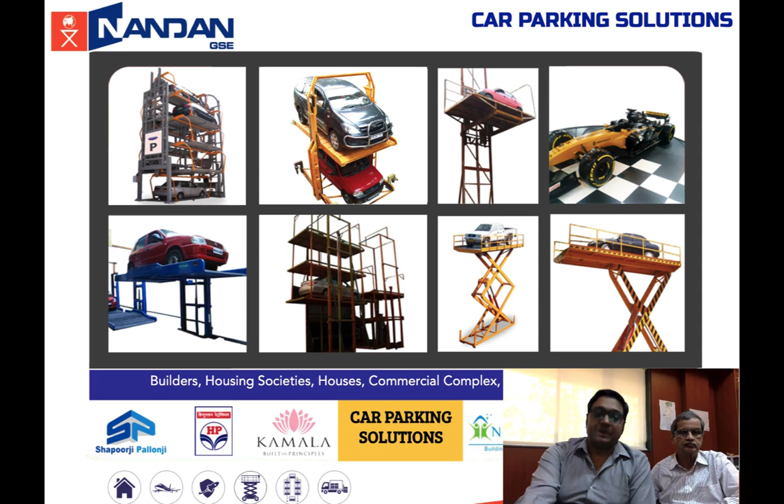And that again is in line with our pitch to improve on the core purpose, which is to utilize mankind for greater endeavors and not just for manual handling.

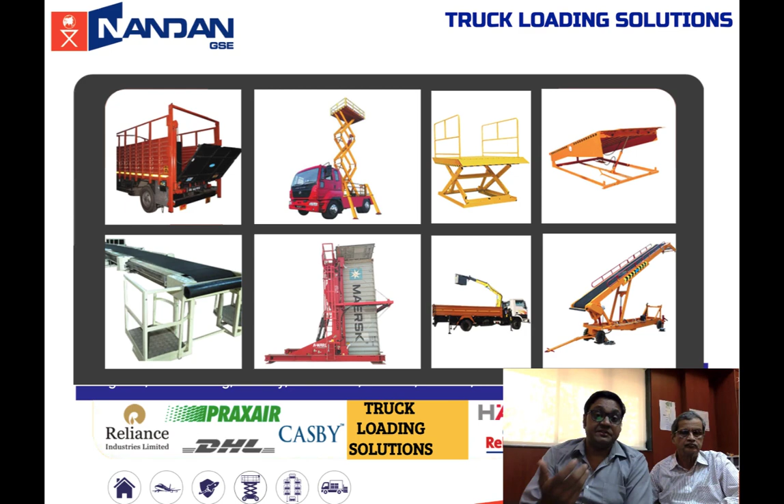This is changing the way things are being done, even in Asian countries or even in India, and there's a lot of buy-in from customers there.

The reason why we remain nimble is because we deliver across a wide range of solutions to a wide range of industries. So for us, each and every client and clientele is important, and that's how the sales team is also segregated.

The solutioning ability is unparalleled because we are able to move from a defense project down to material handling, which could be maybe even a commodity product.

But when the customer buys it from us, he is actually the one to give us the next referral because he loves the product so much. So, like we said, we are not necessarily the cheapest, but we are always the best value for money investment that the customer can make.

We've been featured and we've got various awards and accolades, like we put it up. We've done a car parking system for one of India's most respected business leaders, Mr. Ratan Tata, who's the chairman emeritus of the Tata Group.

I was awarded CEO of the Year last year by Business Connect magazine. We've been awarded for innovation by the government of Maharashtra out of all of the various companies. And we were also the SME Gold Award winner All India for small and medium enterprises in our category, a big feather in the cap for whole of Team Nandan.

We've done theme park rides, handling systems for missiles and other things, and a lot of them are appreciated by customers. So talking about Nandan, like we said, we don't have a standard product catalog.

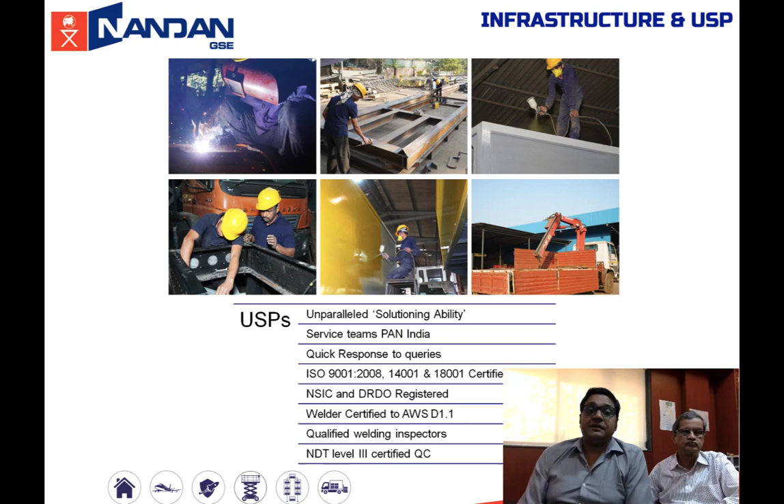Welders are certified to AWS D1.1. We have NDT qualified quality control engineers, painting systems, and the works. So in all, you're in good place when you come to Nandan.

We are able to deliver electro hydraulic and mechanical systems, and we've invested a lot into learning and development. So the team has grown. Our team is able to be your partners in your productivity.

We are ISO 9001, 14001, 45001 certified. We are registered with the various NSICs. We follow the IATA AHM 2019.

Incidentally, I was told by IATA that we are the first out of India to pre-book the 2020 standard. So we believe a lot in learning and going as per the standards and always keeping up to that.

Welding is very core to what we do. We get a third party auditor and certification for all my welders.

Designing is a core strength of Nandan, so we are able to 3D model and showcase the product to the customer before it is actually made.

Safety is very important in what we do, considering the fact that we work in aviation, material handling, defense, and so many other things.

So when we do our systems, whether manufacturing, designing, or delivering them, we always consider the safety of the man who's making it, the man or woman who's going to be using it, and finally the surrounding as well as the articles.

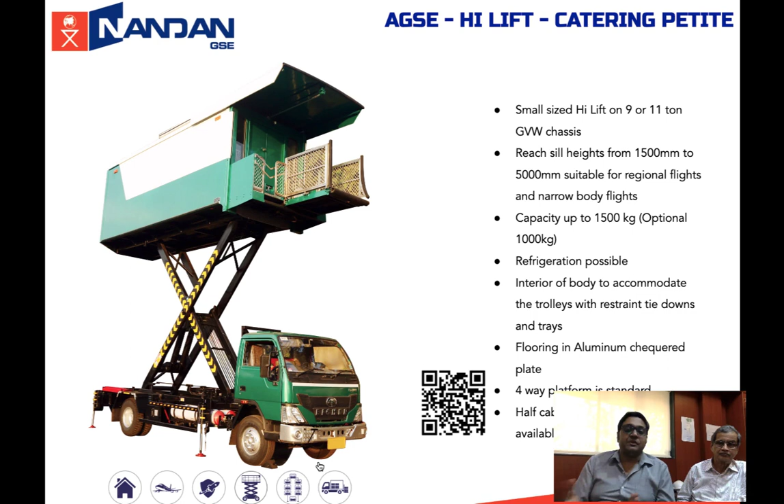But if you want to work on a specific chassis based on your location, we can always make the kit, ship it out to your location, and mount it there locally on a bodybuilder place, and then we can get going on to that so that there's value. Or we can get the chassis into India, make it, and give it to you turnkey. Either option is okay. The capacities are up to 3 tons.

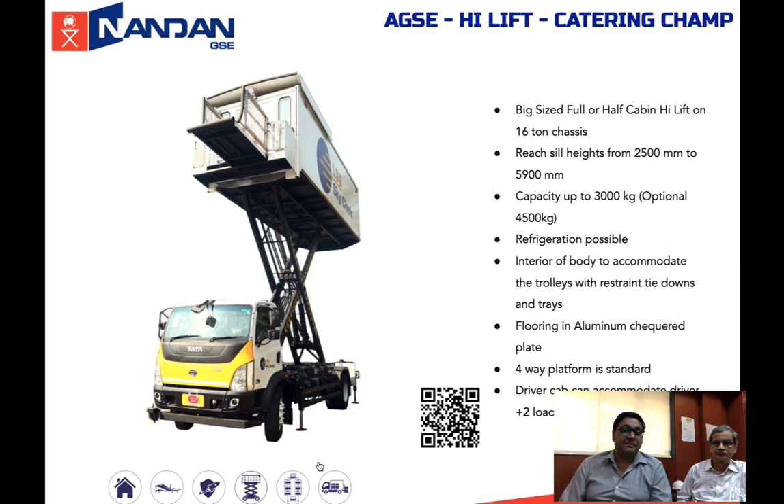Height can go up to 2.5, from 2.5 meters to 5.9 meters. Air conditioned driver cab and the works. So again, this surpasses all kinds of requirements that we need. You can do side doors, you can do front doors, you can do different kinds of tail lifts in the back, refrigeration units, automatic transmission, manual transmission. So it's a different product altogether.

So when we need to talk to you about the high lift, for sure I can present it to you there.

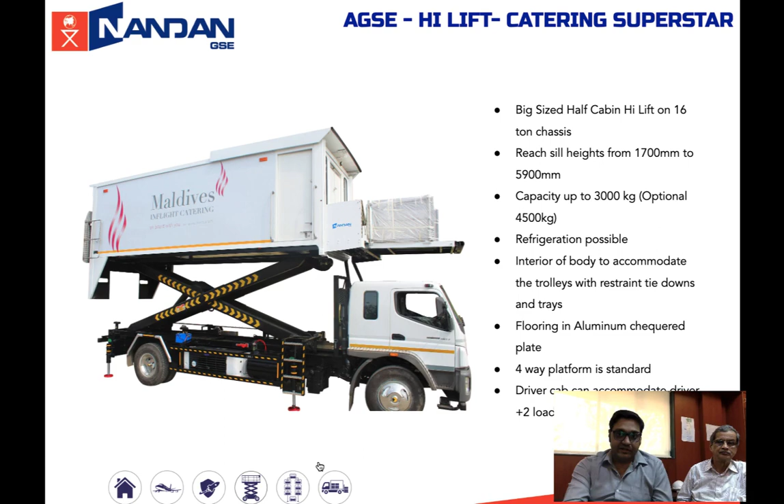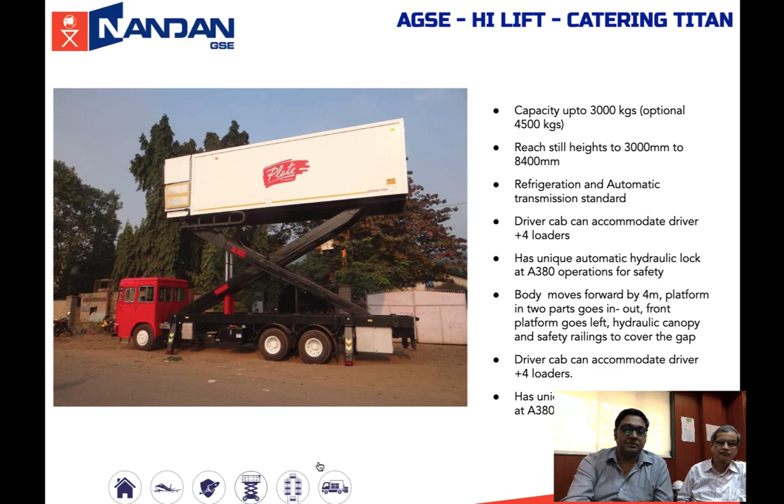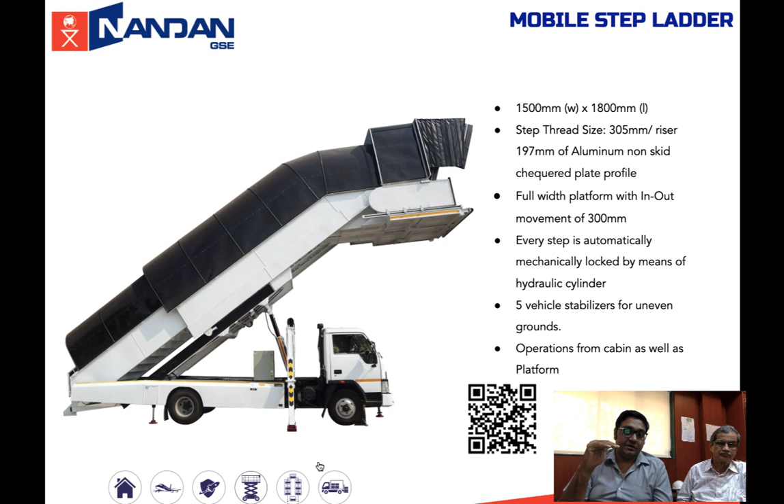We do step ladders for climbing into the aircraft. This is a standard universal model that we give out. It can do from a 737 right up to a jumbo or the lower deck of the A380. All of them is possible.

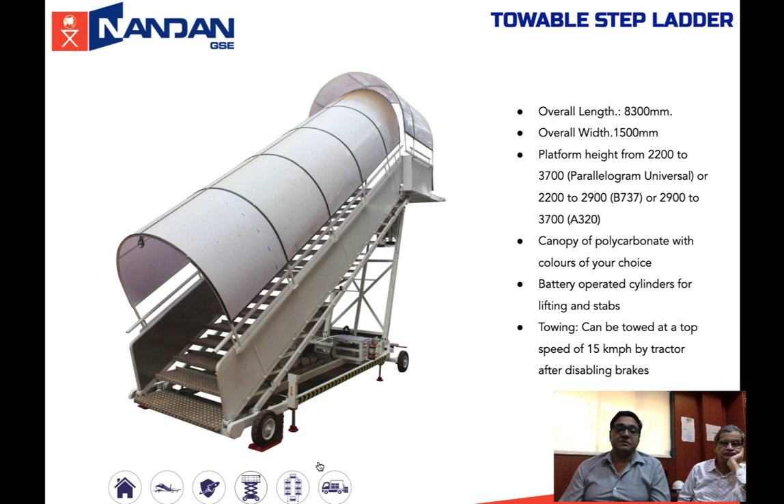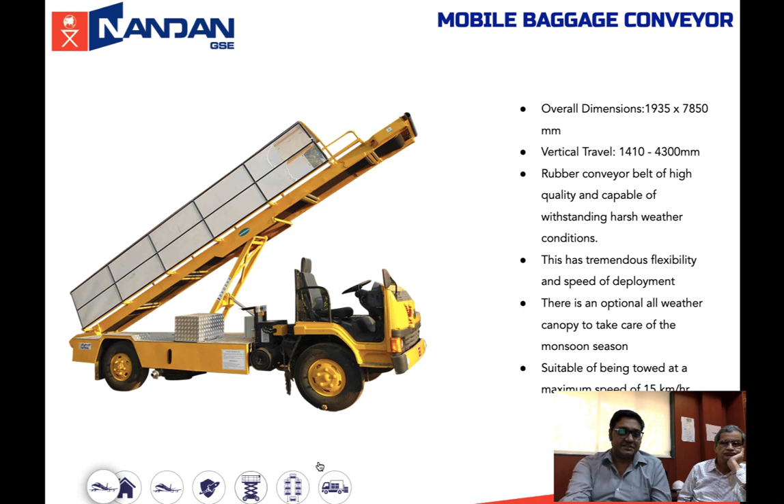Mobile baggage conveyors for loading bags on a vehicle mounted chassis or self propelled. Towable ones with an engine there, and again which can load into the aircraft in and out.

Ambulift for disabled passengers. This is a very important product because people who cannot walk or who are old and have ambulatory problems can be taken on this.

This is a very important product called the Ambulift, which should ideally be there in every airport all around the world. For people who can't walk, there is a wheelchair available in the airport, and to load that, there's a tail lift in the back of this Ambulift, which can get then taken in the body.

It's an air-conditioned body. Then it drives to the aircraft, lifts up, aligns, and then they can be pushed into the aircraft in a very safe as well as in a right manner, because it's legally wrong to pick them up and take them up the stairs, where a lot of countries actually take the shortcut to do this, but this is not the right way.

As per the IATA AHM norms, unless there's an aero bridge, you always need an Ambulift to take them up.

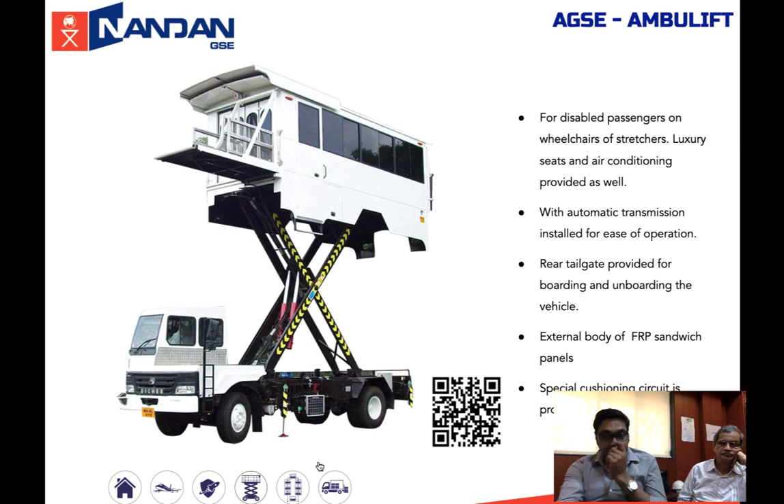This is an electric tractor that can pull up to 25 tons, fully made in India, and with the batteries in place that can do about 8 hours of duty cycle easily.

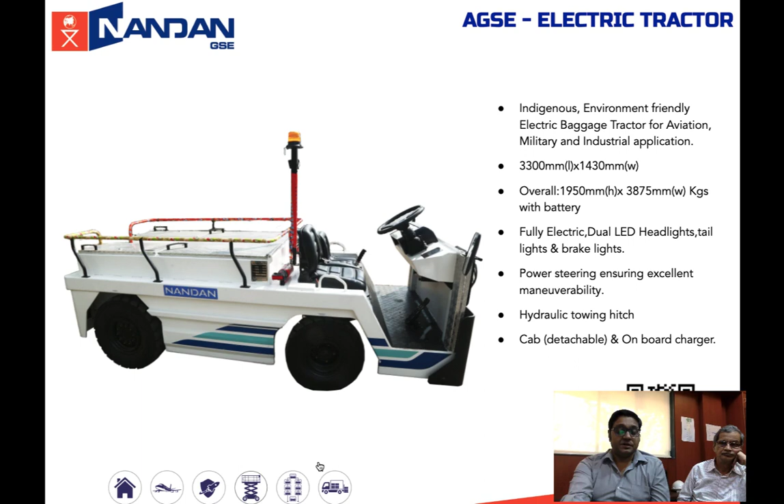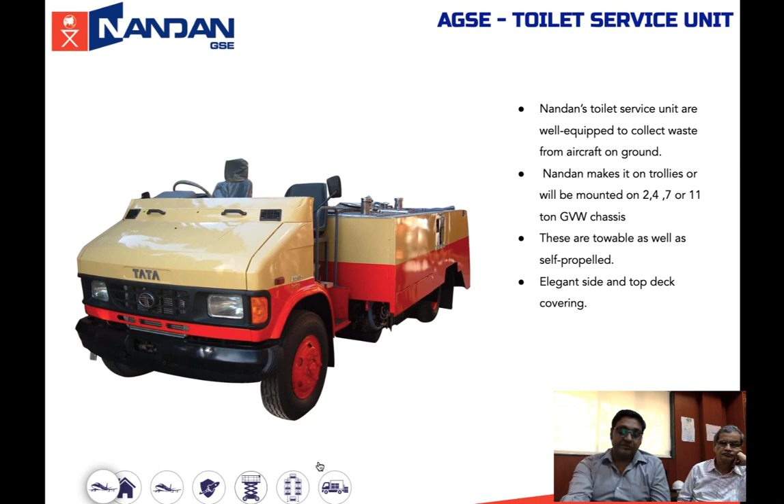There is a water and toilet service units from 1000 liters up to 4000 liters or even 5000. One or two of them have been made.

The baggage trolleys. So the difference between the baggage trolleys that are available cheap and ours, is that ours last for a very long time. We made them with quality materials as well as being lightweight.

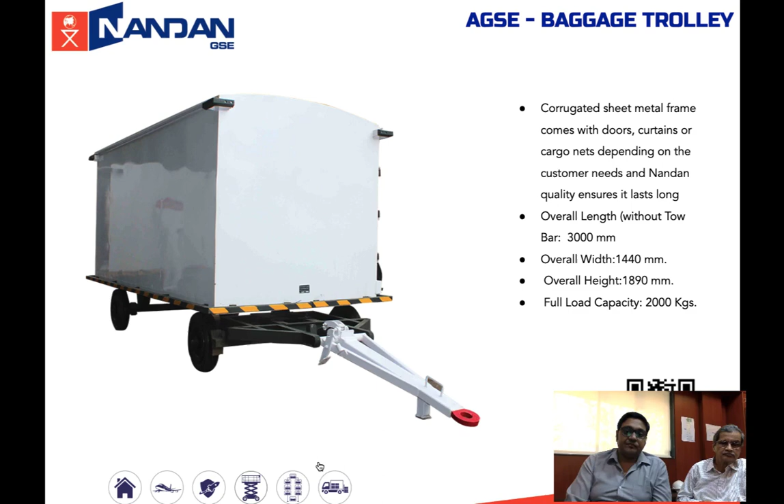SKF bearings on the wheels, solid axles down, MIG welded all over. There's plasma cutting of all the profiles put together. We have 8 by 4 and 10 by 5, two trolleys which can take different kinds of loads.

There are container and pallet dollies also available.

Fuel Bowser. This is an equipment that can take up to 950 liters in a towing as well as in a pickup version. This has either a DC motor, battery operated, or it's got a Honda small engine, or it can have its own hand pump, based on which the dispensing can be done.

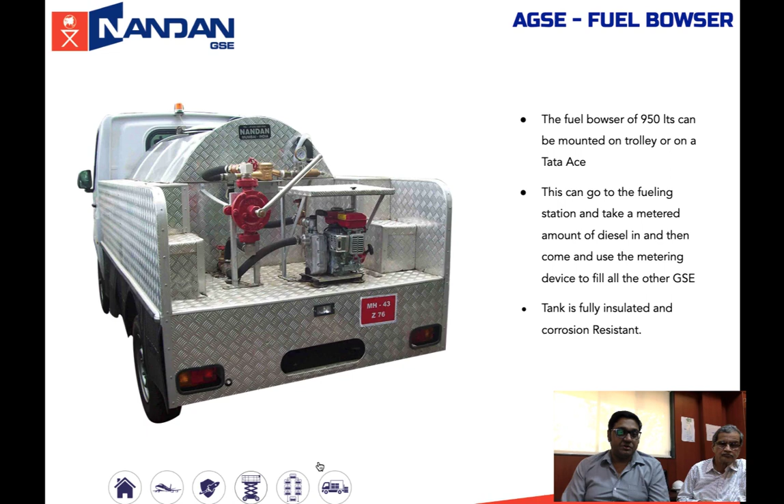So, in short, the GSE that we were wanting to showcase to you, this is what it is. But like we said, we work on customized equipment based on your specs and your standards. Do let us know what more can we do for you.

We worked on trestles, we work on tow bars, on some cargo loaders. We're working on a few cargo loader projects now, and yeah, we would like to work and be partners in your productivity improvement and give you great value.